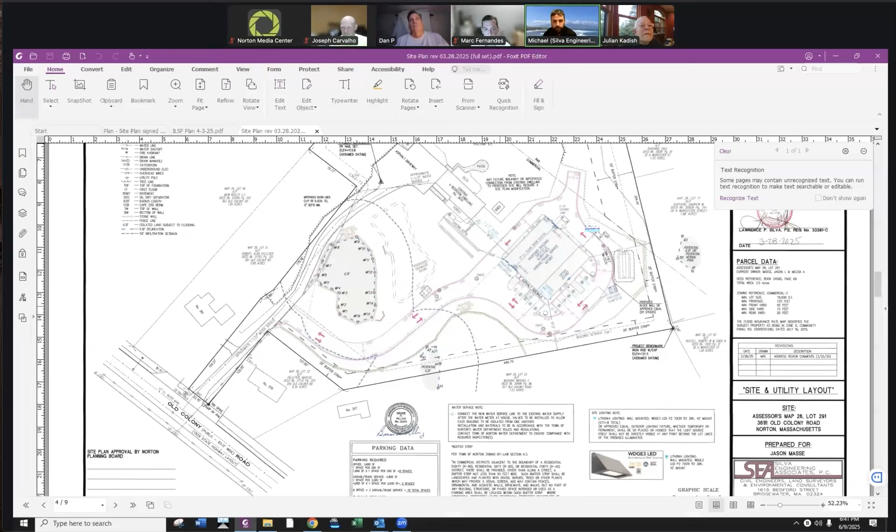I figured I'd show what I presented last time since it's been a while, to jog the board's memory. This is what we last showed you. There was some concern about the land subject to flooding and a potential vernal pool.

So Jason and I met Ken, the botanist, out there. We did a calculation for the isolated land subject to flooding, and Ken flagged the vernal pool. So we went back to the drawing board and had to relocate this access drive.

I'll pull that up now to show you what we changed. This is kind of what we're going for now. Instead of coming down past lot 359, we're coming up in front of Jason, the owner's, house. The access drive now comes along to service this proposed office warehouse building.

The site is all contained through catch basin areas where it goes to an oil grit separator, and it's then discharged into a drainage area.

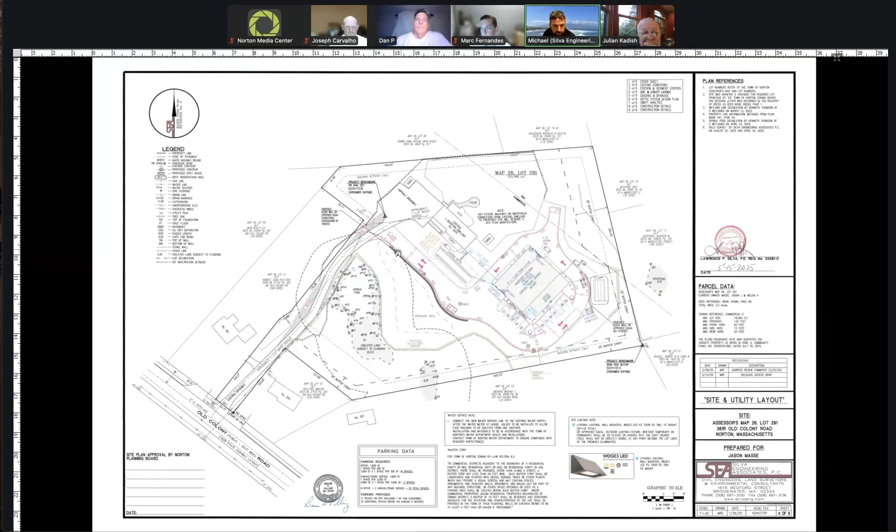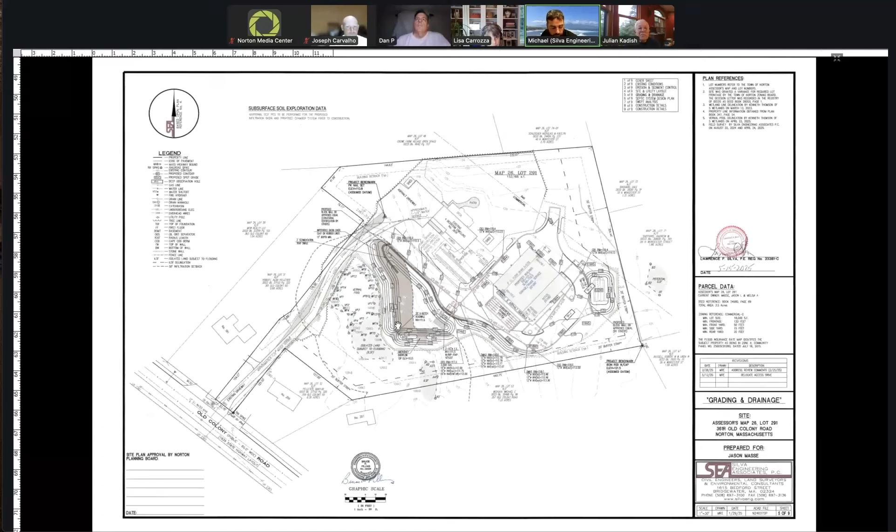The grading plan gives a more detailed view of the grading, the outfalls, riprap areas, grading, and the drainage structures and how they lay out. Sorry, can you zoom in? That's a little too far out. Of course. Let me find it again. Okay, can you see that okay? Yeah, that looks good.

The roof area, as you can see, is contained by the roof chambers, and then the parking lot and access drive are contained through catch basins, where they are conveyed into drain manholes. Then all the stormwater is cleaned in the oil grit separator, and it's dispersed into a drainage basin.

So I guess the question for John - I assume you've gone over this - does this satisfy all of the stormwater concerns?

John, did you hear that? You're on mute. Can you hear me now? We can, okay, yes, great. I switched from Verizon to Nextel, so we're all good.

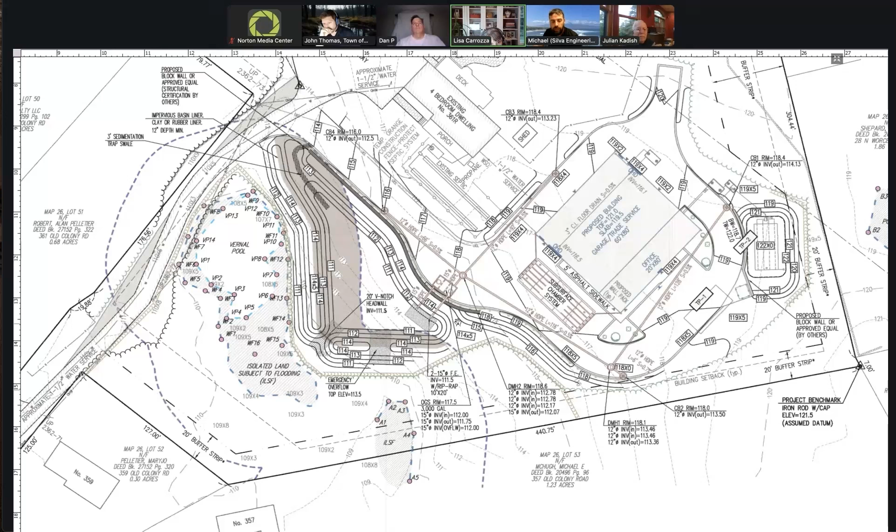Can we go back to what you originally had for a design? I know you were bisecting or going in between the ILSF and... Yeah, want me to pull it up? Yeah, if you could. Sure.

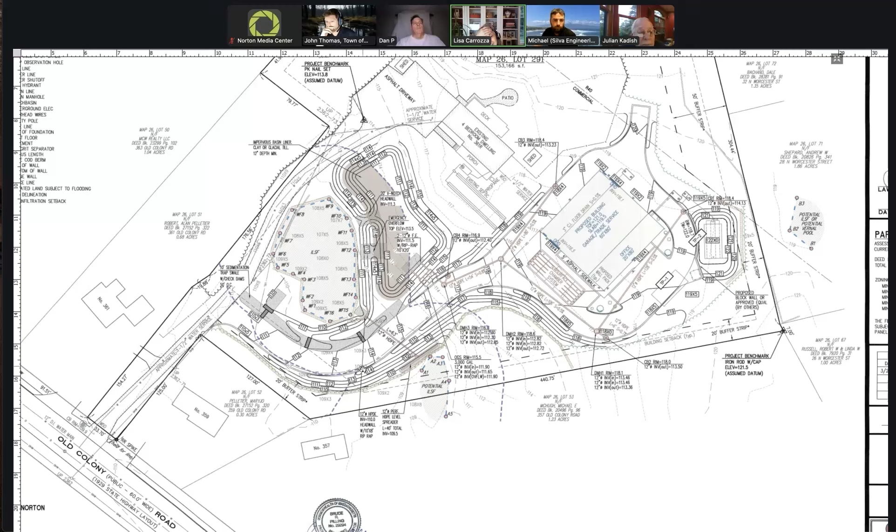So, John Thomas, you said if that's a certifiable vernal pool. I mean, I assume it is. We're going to assume that it is, right? Right. I mean, it says that it needs to be a certified vernal pool for it to basically have the same setbacks. Oh, so we not only had the infiltration basin there, but this obnoxious roadway in between them. So, okay, I got it.

So yeah, I would like to see you look at alternatives for the location of this basin, and measures to first avoid and then minimize. Got it. I'll just inform our client that I would have to make some changes to where we're going to be doing some drainage.

John, was this the issue with the abutter that was getting flooded out? Yes, correct. Okay, same person that came in to talk. Okay. All right. Okay, any further questions?

So, Michael, I think you have a reasonable idea as to how to try to address these issues. Yeah, we have some alternatives you guys pointed out you'd like to see, and I think we're just going to have to go back and see which one is best.

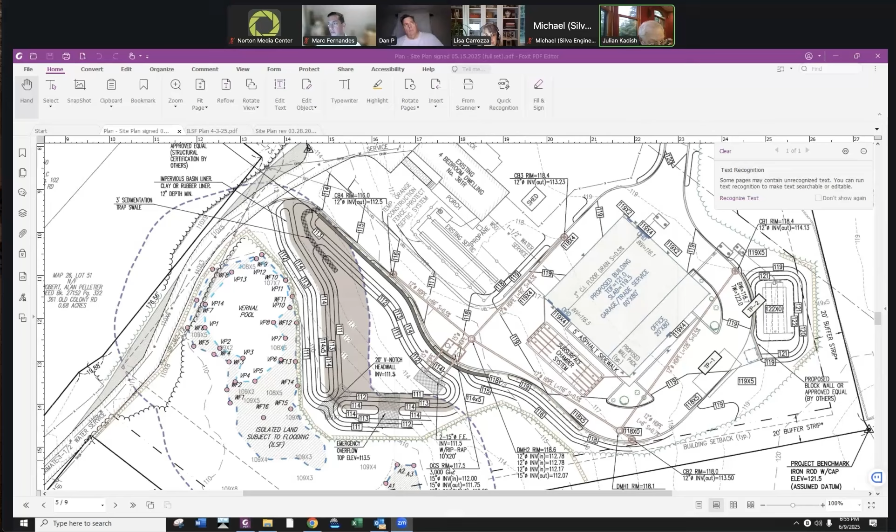We have no new public hearings, so we now are on requests for certificates of compliance. And we have, well, 250-1146, 38 Charlotte Avenue.

Can't remember the detail, but it was adjacent to Winnecunnet. Yeah, so this was the project that the developer built a house in the floodplain, and the concern was that he didn't have a floodplain certificate and the grass was not established on the property. Well, I can confidently tell you that I did receive a floodplain certificate that was signed off by the building commissioner, and also that I've been on site and there is grass growing. So I would recommend to the commission that this project be issued a full COC, as it meets all the criteria that was requested out of it from the order of conditions.